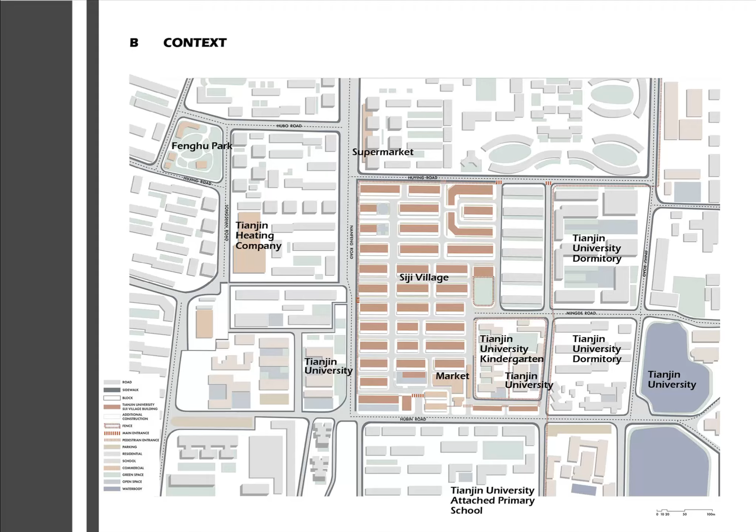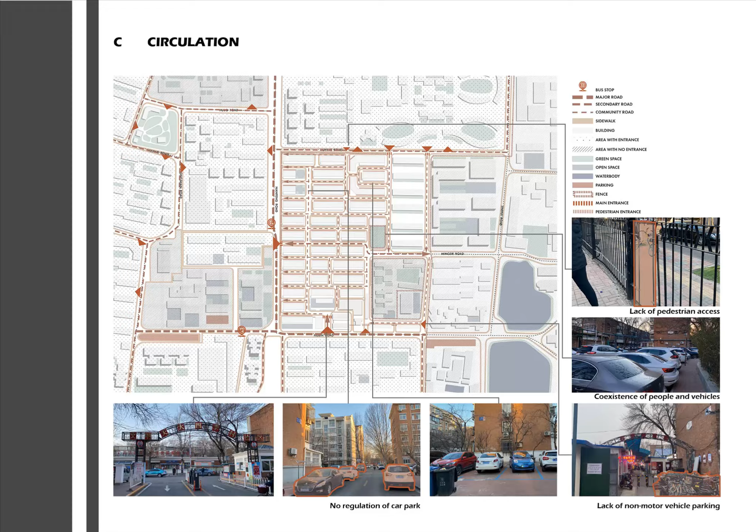The main entry can be accessed by both car and pedestrians. The informal entrances show that there are demands for extra entry for pedestrians. The lack of regulation of parking is inconvenient and unfriendly to pedestrians, especially for seniors and children.

The neighborhood is enclosed with fences. The facade of the building along the outside street and the market are open to the public. Few visitors enter the neighborhood. Residents mainly go to the courtyard in their blocks.

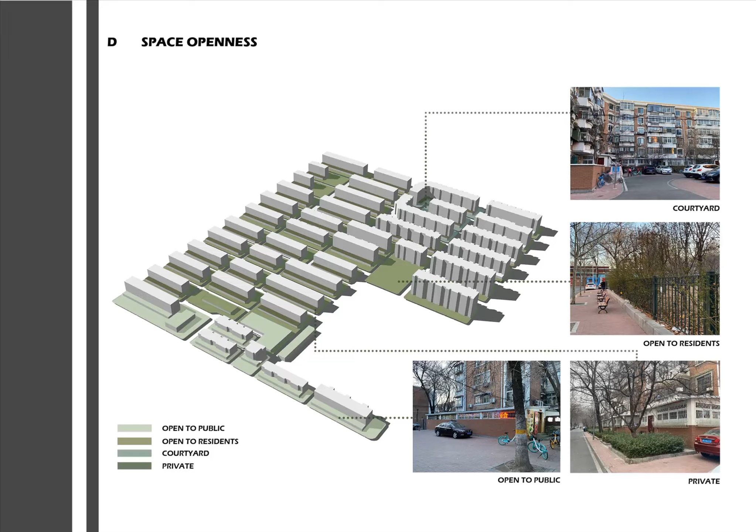There are 2 fitness squares and a park in the site. The park is closed for the protection of the trees in the park.

From the space analysis, I identify some potential spaces that may be developed, including the vacant space between the buildings, misuse space of private garden and parkland, and unutilized space of car parks.

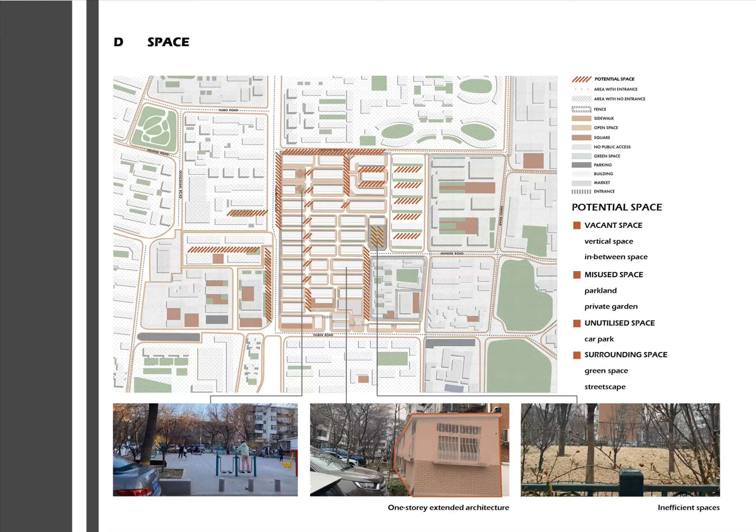Surrounding spaces may be used as sharing space linked together with existing neighborhood public spaces. From informal conversation with residents, we know most migrants live in the southern part of the community because there are markets in the area, and some of them are shopkeepers.

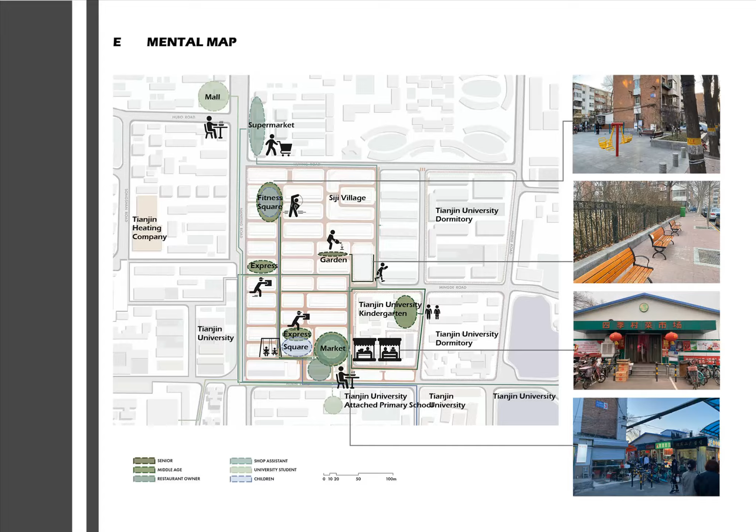Seniors prefer the north part because it is relatively quiet and has space to hold activities. Seniors and families are more likely to go to the markets for groceries and vegetables.

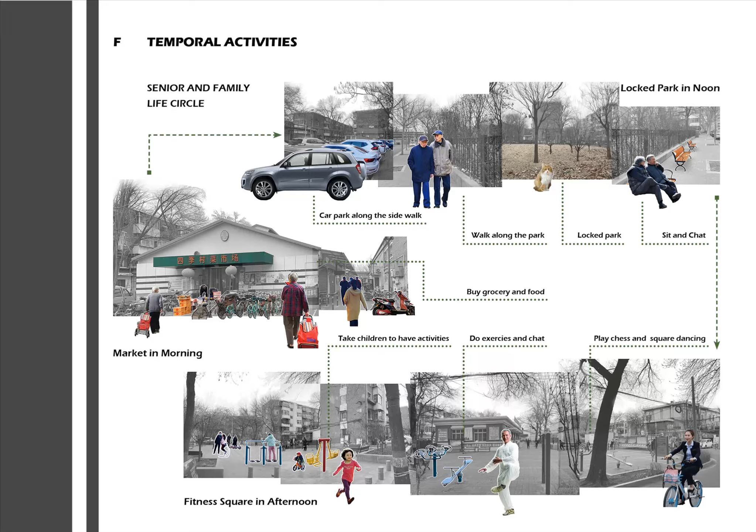Seniors prefer to move around their living building or gardens nearby. Families are the major users for the fitness squares. Migrants and younger people go to work in the morning. The commercial streets are vacant sites in the neighborhoods at that time.

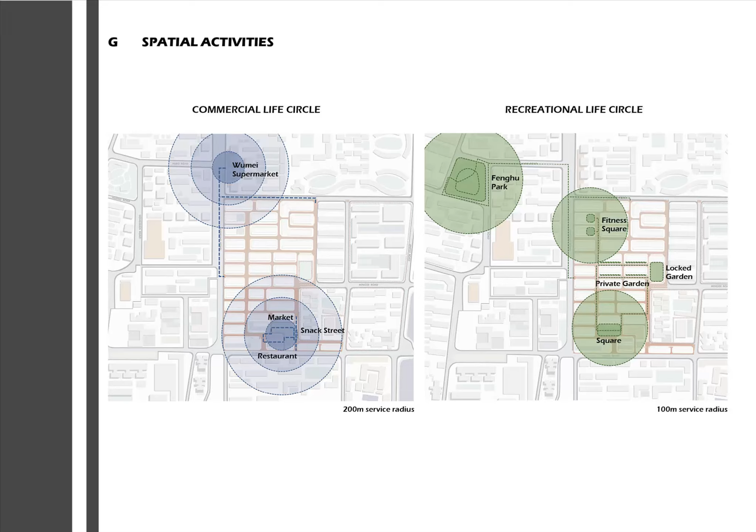The spatial activities map shows that residents mainly go to the market and supermarket to go shopping, and the recreational space for residents is limited.

From the structure of the population and their social activities, we can see that the largest group of people in the neighborhoods are mostly seniors and migrants. The hotspots in the neighborhoods are the market and snack street for all ages, and squares for families.

In terms of strategy, since seniors mostly live in the northern part of the community, there is more possibility and necessity for these residential buildings to add elevators.

Because there is more demand for elderly people to have open spaces near their houses, elevated spaces assisted by the elevator are more feasible in these areas.

Connected with the existing squares, the fluctuated spaces provide opportunities to support more open spaces. Linked to the entrance, the original locked park has the potential to organize a continuous activity corridor.

As the market has already formed a community center with the largest population flow, the function of the interior space could be enriched to hold activities.

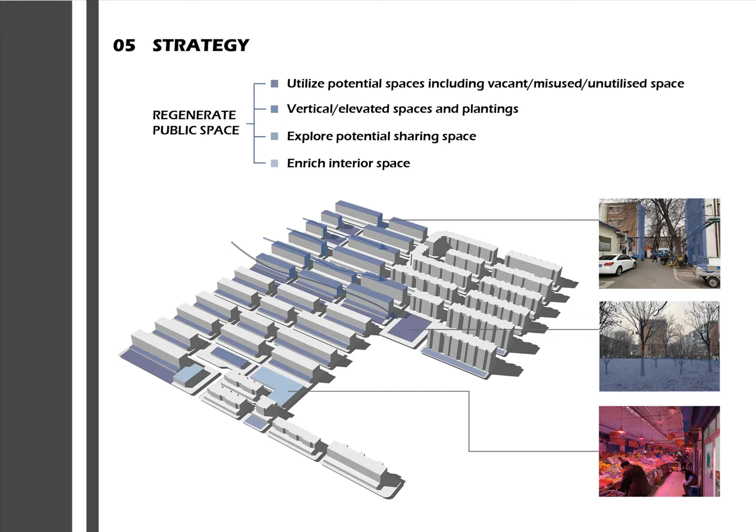From the accessibility analysis, there are 3 existing car entrances in the neighborhoods. To separate pedestrian and car traffic, I propose concentrating car parking near the entrance in the form of vertical parking to provide more space.

I also propose normalizing bicycle parking along the main roads, and setting up pedestrian zones around the market and the park next to the academic and residential areas, where most people gather including children and seniors, to enhance the connectivity and coherence of public space.

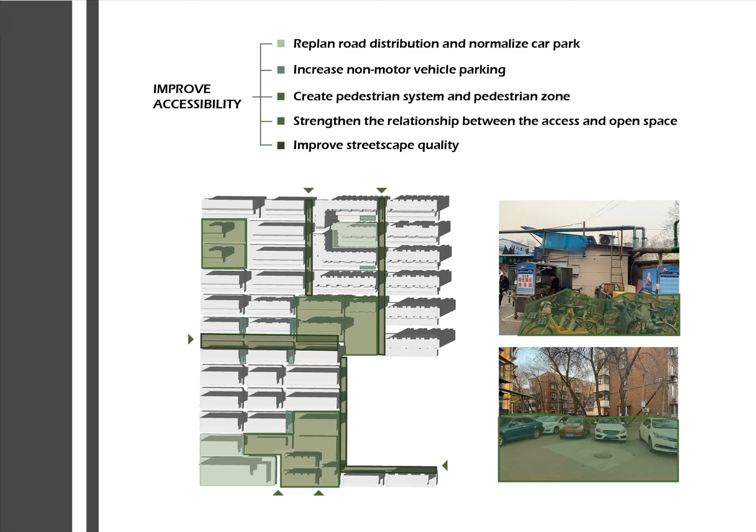Some streetscapes could be stressed with program or green spaces. To enhance the co-living of residents from different groups, the community is encouraged to participate with support for seniors of different ages.

For different ages of old people, they have different kinds of demands for urban spaces, based on distance from home and accessibility of spaces.

For other groups of the population, migrants and families with children, their demands should be considered and combined together to enrich the community activities.

Combined with these strategies, the conceptual plan shows the potential planning of the neighborhood. The commercial area is centered on the market. The open space is optimized with the utilization of inefficient spaces, including the rooftops and vertical links.

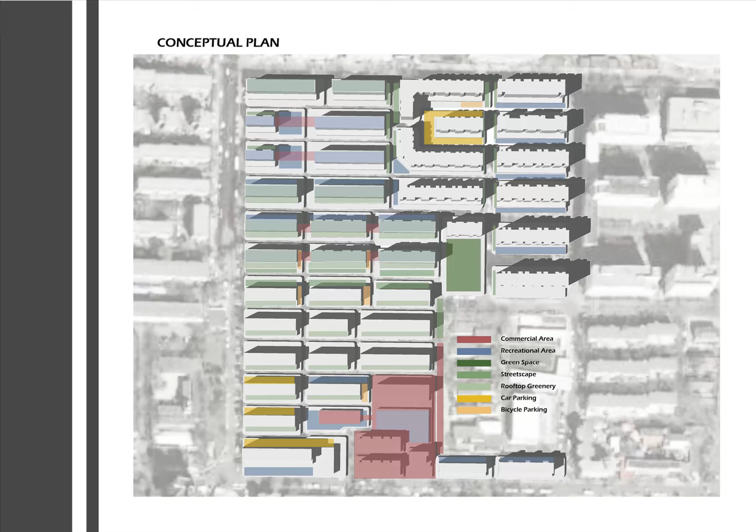The multiple layers of the structure make the best use of the spaces. The green space is integrated and intertwined with the community garden and streetscapes. The car parking is regulated and concentrated in specific areas next to the entrances.

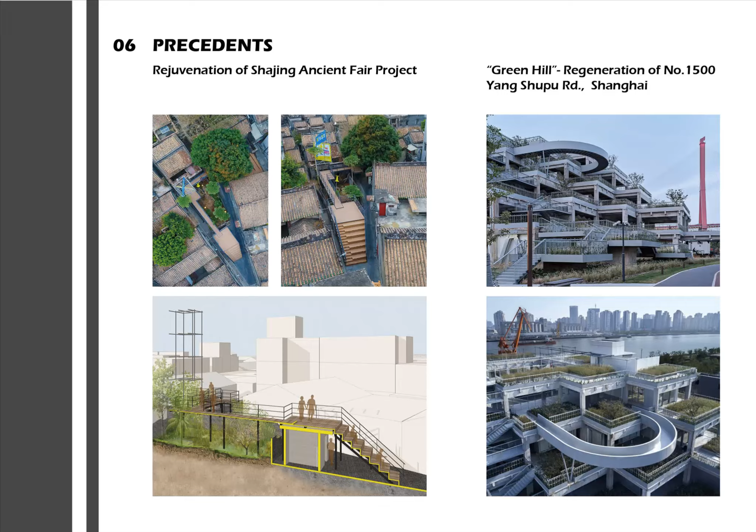The precedents inspired me from the utilization of inefficient space, the vertical design of activities using elevators or multi-layer structures, and the combination and variety of modular application and planning of in-between spaces in the limited environment.

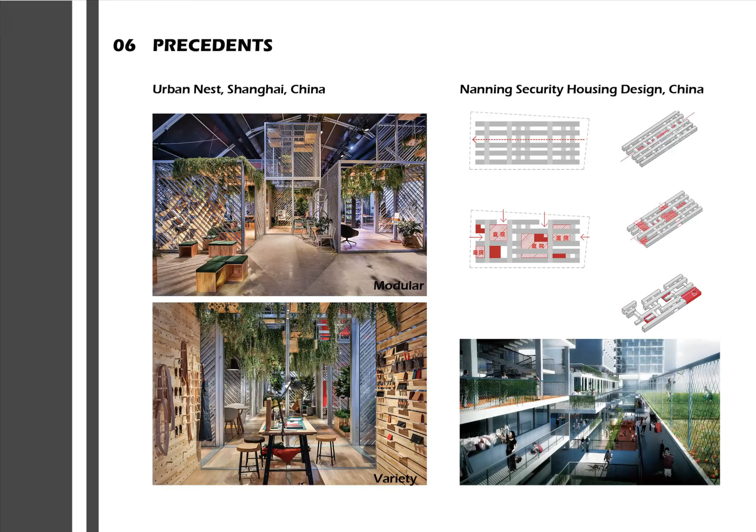In the next steps, I will push further into three-dimensional design to achieve the best outcome, and that's all for today. Thank you.